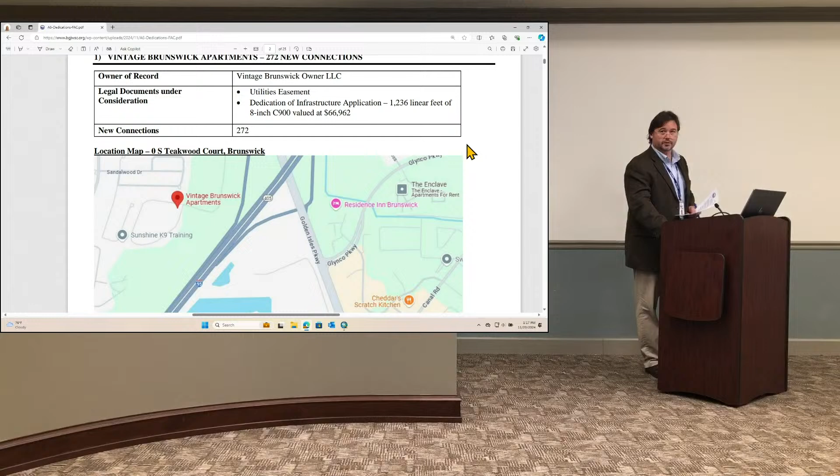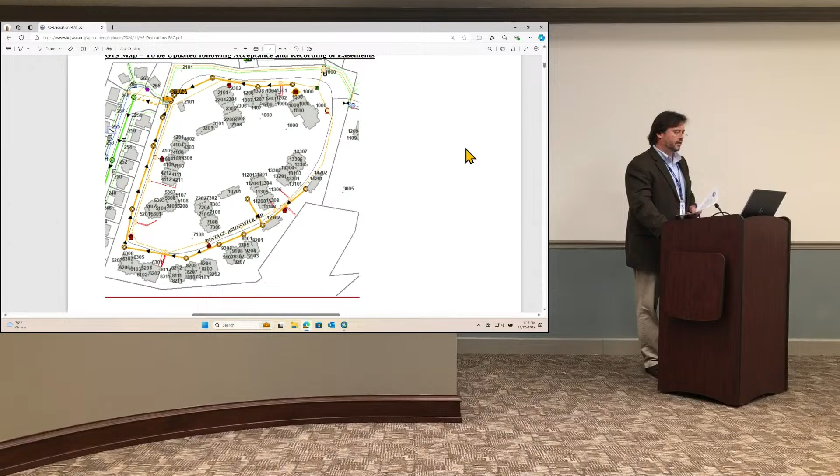This development has been occupying in phases, but they're finally done with everything, all final paving of the different phases. 272 new connections or apartments out there is what that's bringing on as customers to the Joint Water Sewer Commission. The yellow line indicates private on-site gravity sewer going to a private pump station that has a force main that jumps out to our closest manhole.

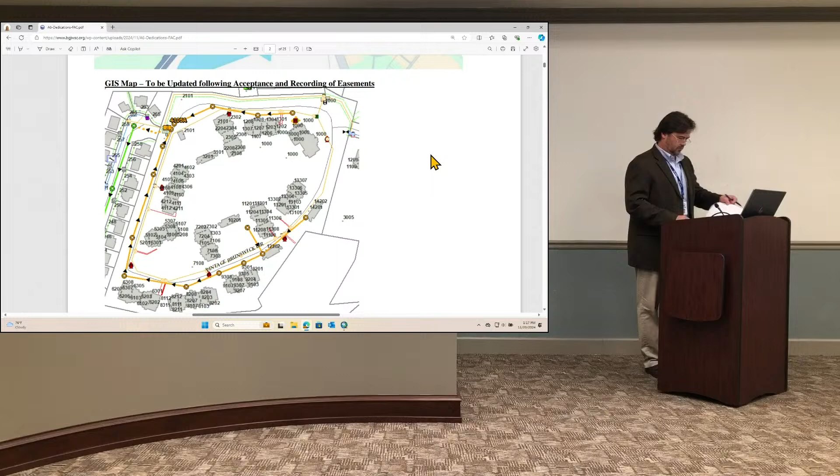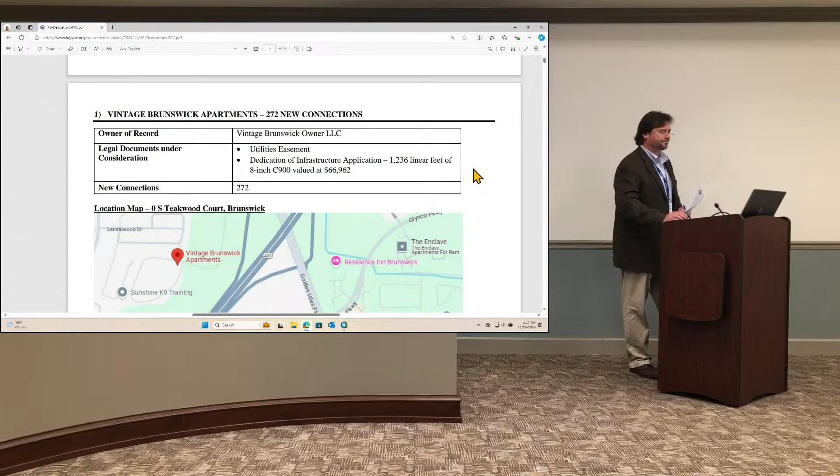In this case, this is the water line we're talking about: 1,236 linear feet of 8-inch C900 water main, plus a little bit of easement. Now, we'll point out also here, there's an adjacent development that's going on.

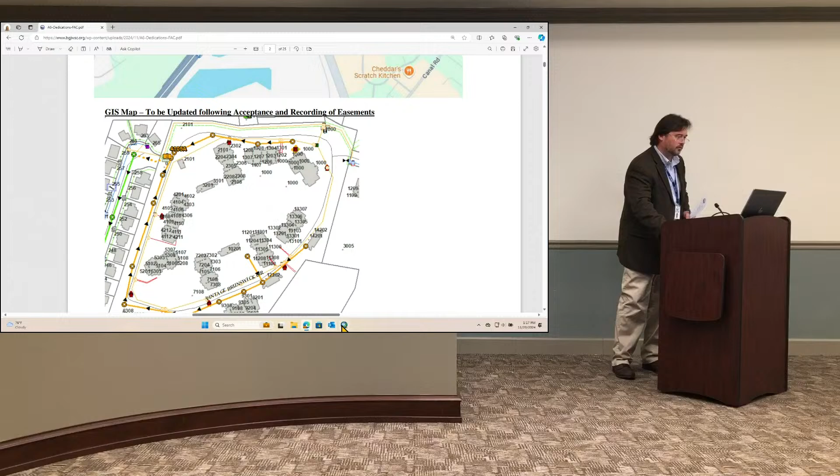Pull up GIS since I've already got it pulled up, help me explain this one. Vintage Brunswick - there is also an adjacent development going into this area here, and right now it's the same company developing both parcels. We had them give us an easement through here, of which they're going to have a force main that's going to serve this property. So that's not included in this dedication; it's just that water main.

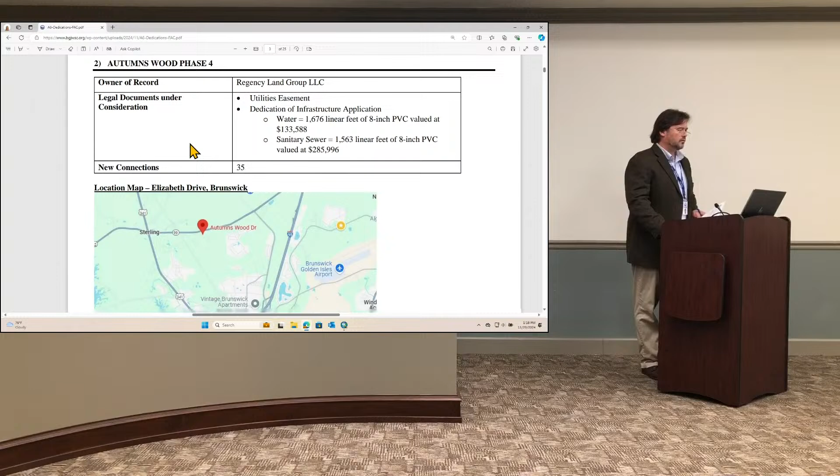Next one is back over here: Autumns Wood Phase 4. This is a residential development, the fourth phase, off of State Route 99, just a little east of the Sterling and 341 intersection.

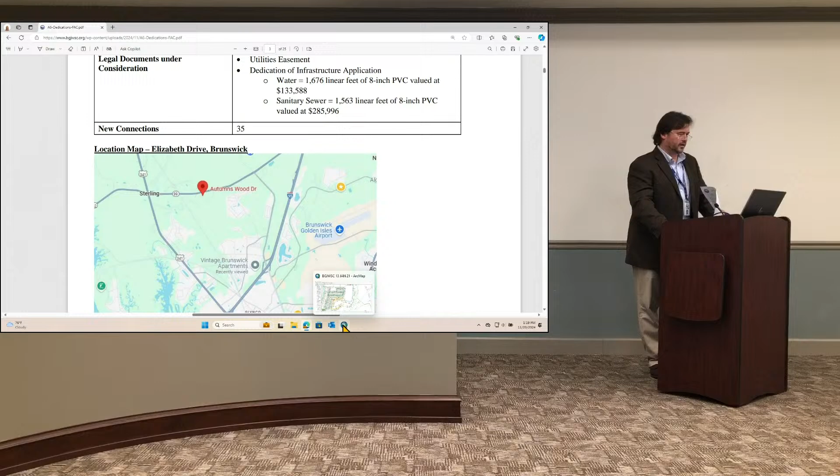This one has a little bit of water, 1,600 linear feet, and a little bit of gravity sewer, 1,500 linear feet. This will also wrap out the phases of Autumns Wood subdivision.

And that's located right here. In Phase 3, you may remember there was an easement and sewer main dedicated straight through this property of Phase 4, connected into the deep gravity here, which goes to our pump station 424. So there was already a trunk line of gravity sewer dedicated in the previous commission meeting, and this is the balance of the sewers for Phase 4.

And there are record drawings to support each item, and I'm happy to answer your questions.

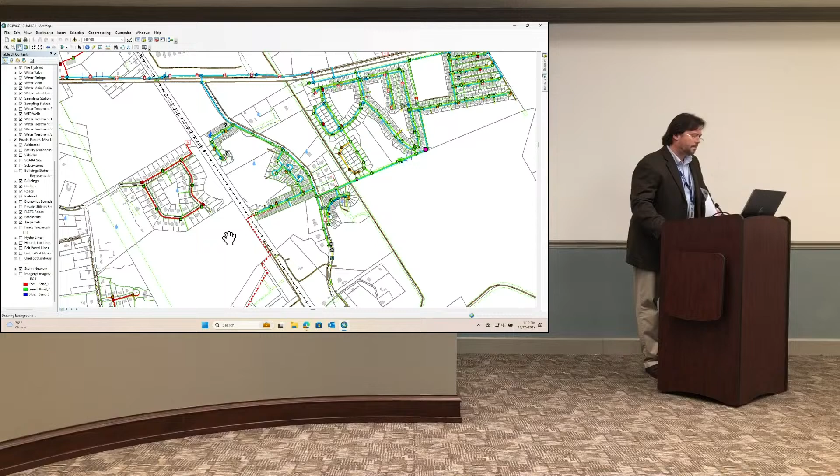What's the red circle for around Chanslor Place? They just circled that to indicate where it's at, showing you the area. So Chanslor Place, that's a place name for this subdivision - it just bled over on Glynn County's GIS, it's annotated that way. So that's not Chanslor Place, that's this development over here; Phase 4 of Autumnswood is this one.

When you see something in orange on our exhibits, orange typically means under construction with ownership not yet determined - could go private or public. In this case, it's going public, so it'll turn green if the board approves, for the sewer, and blue for the water.

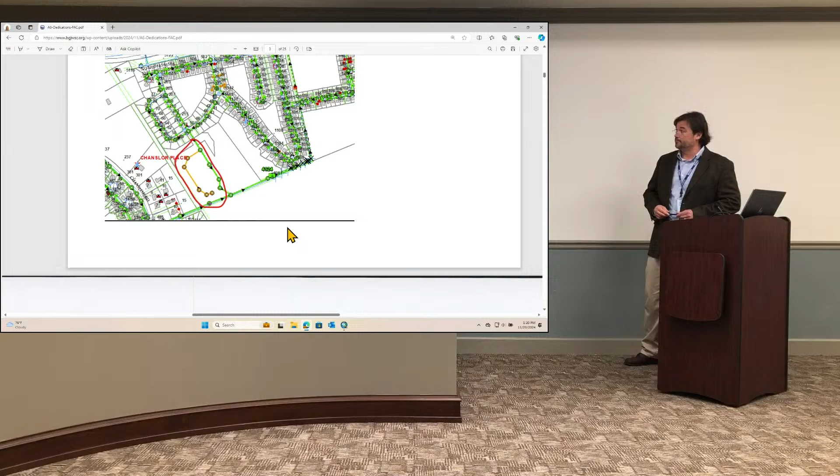Have a motion? I'll move the Facilities Committee recommend the Full Commission approve and accept these projects with associated documentation. I'll second. Motion seconded, any further?

I do have a question for Todd. On the Autumnswood values, can you explain how they reach - they're very close in linear feet and same size pipe, and the values are significantly different. Can you explain the difference in the two values? One's 133, the other one's 285.

He's talking about the difference between water and sewer values. How do we reach those values? Commissioner, I can provide an explanation. I'm just wondering how we reach the numbers like that - is it because of the labor involved in putting it in? Correct. So the values, and thank you for asking this question, this gives us a chance to point out where that comes from. The values come from, and I think I've got a dedication document here.

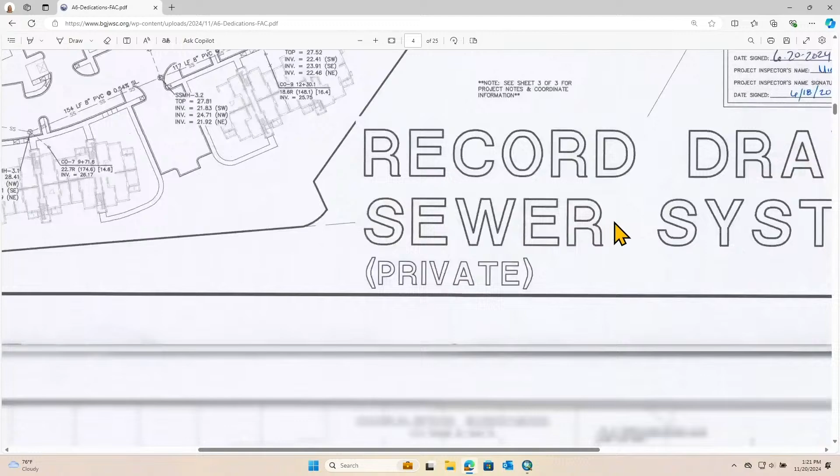Should have one down here for autumns. The engineer of record typically will fill out the asset dedication documents.

One has water line 1236 and it's valued at 66,000, and the other has 1,600, which is more, and it's valued at 133,000.

So the values typically come from the engineer of record who represents the developer. Their pricing is their pricing. It's not necessarily an appraised value, and it really doesn't have any effect on us.

It's still going to effect our property. It becomes our property. Correct. I was just wondering because there's such disparity. I know we accept them because it really is not of any value to us monetarily or anything.

It gives our finance folks a basis on which to capitalize the assets. But as far as the values, that is a fair question. We don't have a part in establishing that.

As long as it seems reasonable, we look at it to see if it's reasonable. If somebody were to put $1 in there, we'd raise our hand, or extreme amounts.

But certainly we're going to recognize differences between water and sewer and between projects. Sewer typically being installed deeper, well pointing and everything like that may be necessary, that's going to be more expensive. Typically, gravity sewer will be more expensive. There's structures involved. The gravity sewer is deeper, et cetera.

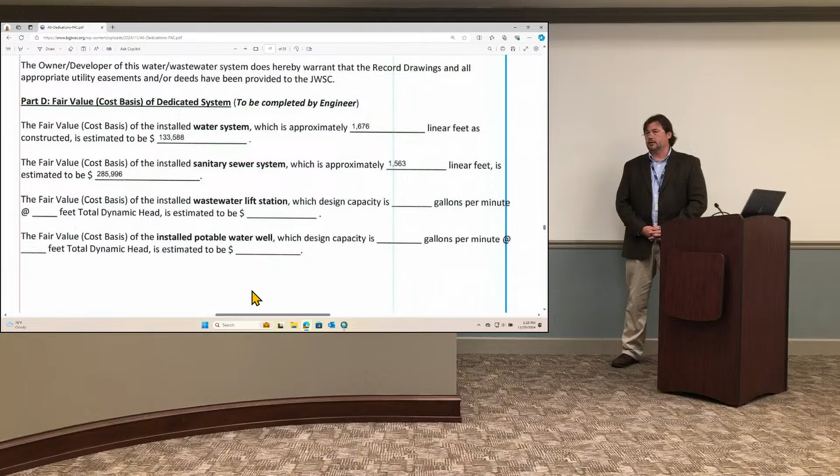Are there some sort of standards that are used in something like that, or is it just however it is? I mean, the assumption would be that they're just literally putting what they paid the invoices for as the total. But we don't get a copy of the invoices to confirm that, so I'm saying my assumption would be this developer paid contractor this amount of money, that was their cost.

I was just curious, because the numbers are very skewed like that, and there's no consistency, definitely. That is true. One of them says 8-inch PVC, the other says 8-inch PVC C900. So is it both of them C900? They'll both be C900 on the water line, yes sir.

All right. I don't even know what favor. Made enough trouble with questions. I think we made a motion. Y'all made a motion, but we ain't voted yet. Very good, all in favor, raise your right hand. Thank you.

Water production report, Mr. Burris.

For the city system, or the mainland system, for the month we did see a slight increase in flows because we finally got some dry weather for the month.

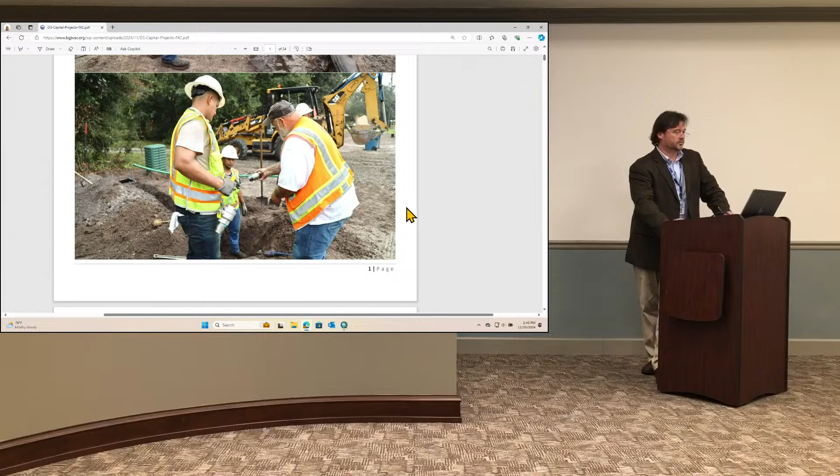You can see here, if you notice the silver finish of these fittings going in, these ball valves and whatnot on the air release valves, stainless steel is what we specify, 316 stainless on the appurtenances and valves and such. And you may notice these look like telecom cabinets of sorts, and that's kind of by purpose or by design. We used to use concrete in-ground manholes for air release valves. Let me back up a little bit. Air release valve - wastewater by nature will develop gas over time. Gas will come out of solution over time, formed from bacteria activity and whatnot.

That gas forms bubbles at the high points of the force main. Those bubbles accumulate, which can cause a lot of issues with your flow for your pumps. It creates a barrier, a barricade, makes it really difficult, and it can impact your flow rates. You have to get that gas out of the mains to get a solid pipe full of water.

So we have what's called air release valves at the high points, where that gas collects naturally. It exhausts that gas with every cycle, every push of the water down the force main.

Now, it's very important, these are a maintenance item like anything else. It still has to be maintained. A lot of times when it's in the ground in a manhole, it's forgotten about. So what we do, these pedestals are a lot more visible, easier to access and maintain.

They're also a lot easier to install in the right-of-ways. A lot of times the right-of-ways are really congested with other utilities, so it's easy to simply run your service pipe from the force main off to the side of the right-of-way. You can tuck it back conveniently and keep your force main functioning as it should.

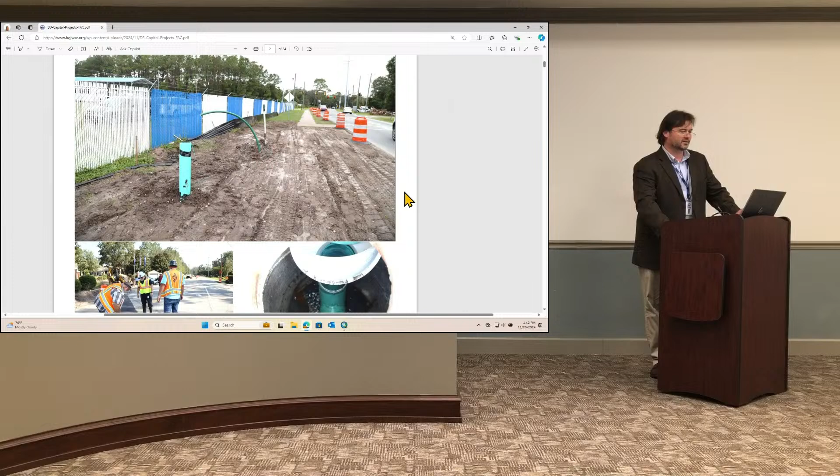So that's a good shot of the guys working there installing that, and that's typically one of the last things done in a force main project. There's a good shot of one of the locations of the service whip coming out for your air release valve, facing back towards Old Jesup Road.

This is a picture of what we affectionately call urinals - guys will get that. It's just a catch basin inside of a manhole with a downspout that directs the flow from the receiving force main down into the outward channel. That one's actually coming from 4107, I believe, the one on the upstream side.

Road patch going on here, and the guys are actually going to come back and square this patch off right in front of Eagle Pointe Apartments. They're going to do a little better job than just a patch, come back and square it off to make it look a lot better. That was one of our punch list items. With every project, we have punch list items.

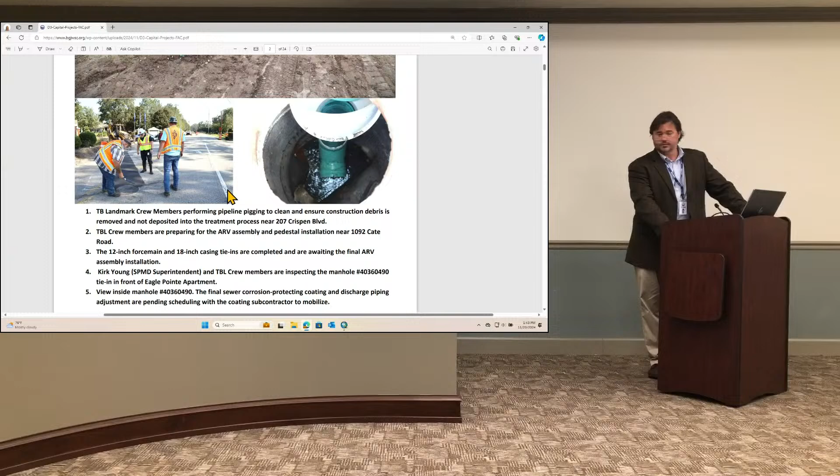One last thing to talk about here. The receiving manholes also receive a protective coating. When that force main discharges wastewater in, there's a lot of splashing and agitation. Gases can come out of solution and create a corrosive environment. So all receiving manholes we have coated with a protective coating that helps with the longevity of that receiving manhole, to protect it.

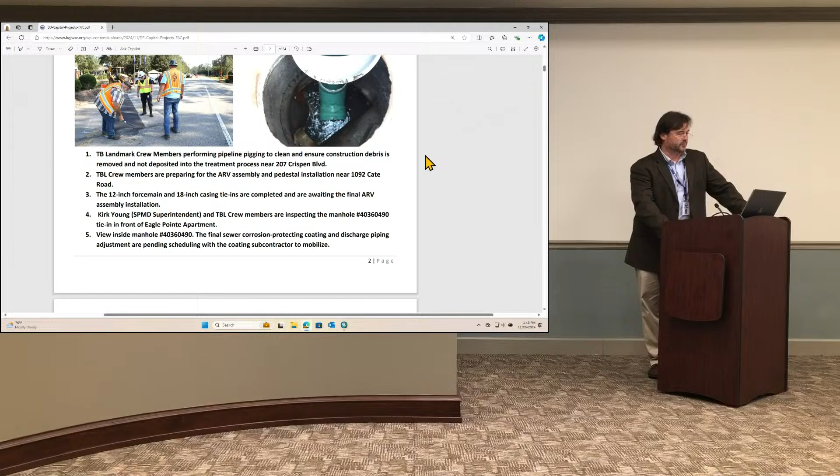Next project, Arco area, water and sewer extension. This is a really good aerial view of the last bit of construction going on out there as far as the installation of the sewer main. You can see the tight, unopened alley.

That's public right-of-way through there, an unopened alley that through the years has been encroached on - our legal folks would say trespassed on. But anyway, this was one of the adjustments we made with the project. The contractor actually worked with the engineer to get some of the new gravity mains out of the roadways, avoid pavement replacements, and get them into these public right-of-ways.

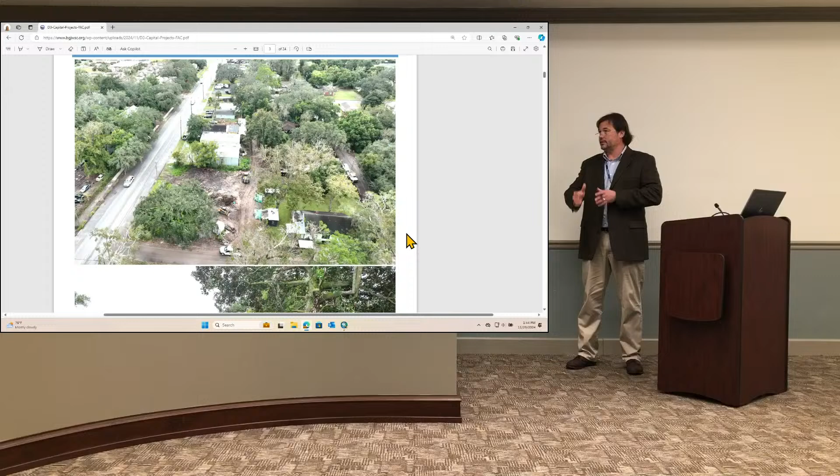It may take a little more work to open them up and get them in there, but it's happening. It's just a very slow, tedious, meticulous process. And it's a benefit to the customers because their laterals are already coming out that direction.

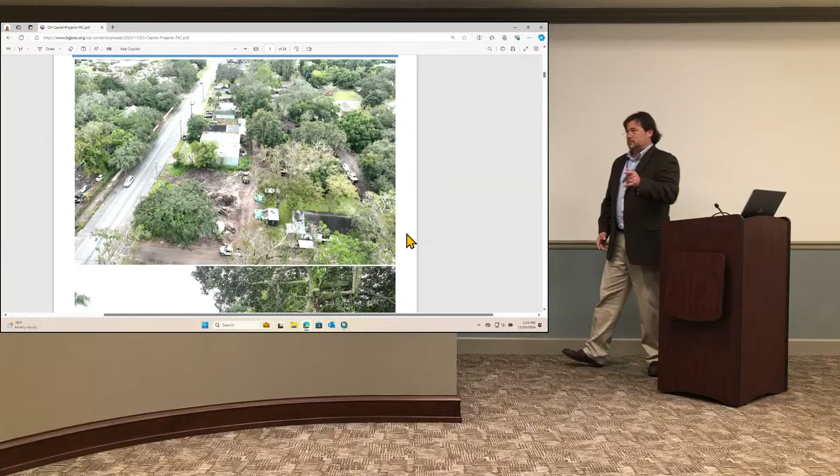Very good point - along the back of some of these you'll see septic systems, so this new gravity system is running right by their septic systems, which reduces their cost to hook in. Exactly, Mr. Burroughs pointed out it makes the connections that much easier.

And there are some of those going on along the way. Next picture down is another good shot looking down one of the unopened right-of-ways or alleys, and you can see the fencing, sheds, dog kennels, and everything else you can imagine that grows over time in those areas.

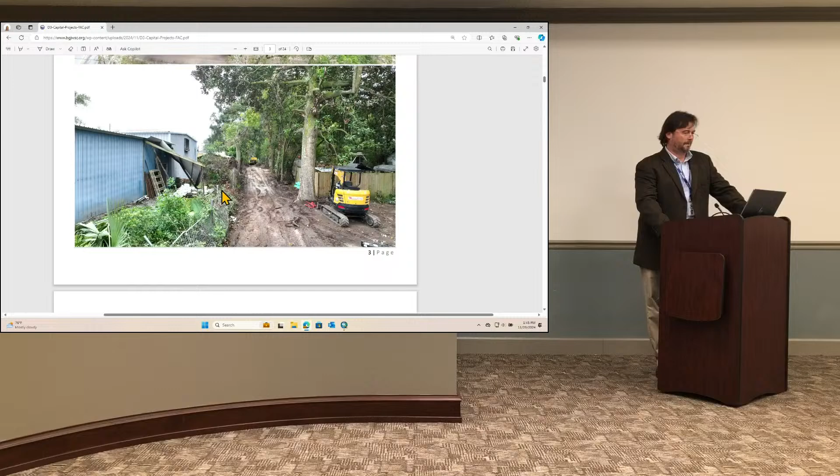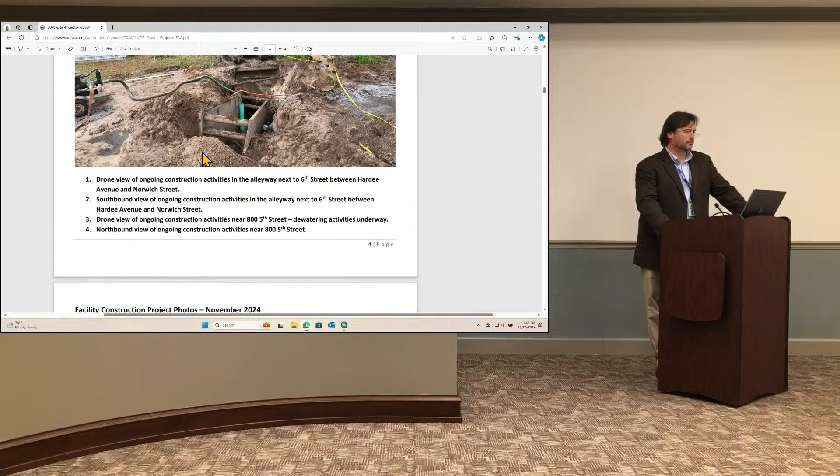More good shots of that, the type of work that's going on. It's a very wet area, as are most of our deep digs in our system.

Galvanized replacements, that's an ongoing project with our in-house staffing. They recently finished up Lake Circle Drive off of Old Cypress Mill, and they're finishing up the areas in El Dorado, Menendez, Rivera, those streets over there off of Frederica. Got to get one more section of 8-inch shot by the drilling contractor to tie all that loop in, but they're trying to get all of the customers tied onto the new line even before they loop it. They'll get more benefits once it's looped, but get them tied on the new line and off of that old galvanized line that's in there. Pretty immediate benefit and improvement in the service once folks are tied on these new lines like this.

Of course, look at the pipes. Yeah, that's typical. So this is Ms. Brandy, Administrative Coordinator for Water Distribution over there at the South Harrington plant, and she's proudly showing off some of the gold they've dug out of the ground that comes out of the scrap pile in the back.

Can I ask an obvious question? What was the goal of putting galvanized piping at the time, was it cost effective or? Technology at the time, it was probably the cheapest, most convenient. It was better than black iron pipe, had a galvanized coating, lasted a little bit longer, but it was probably the technology of the day. Sure didn't take too long to figure out that it wasn't going to work out in the long run. I mean, they put galvanized in for a good 20, 25 years, it went in the ground for a while. I'll say it's probably lived its life expectancy. It's beyond, obviously beyond.

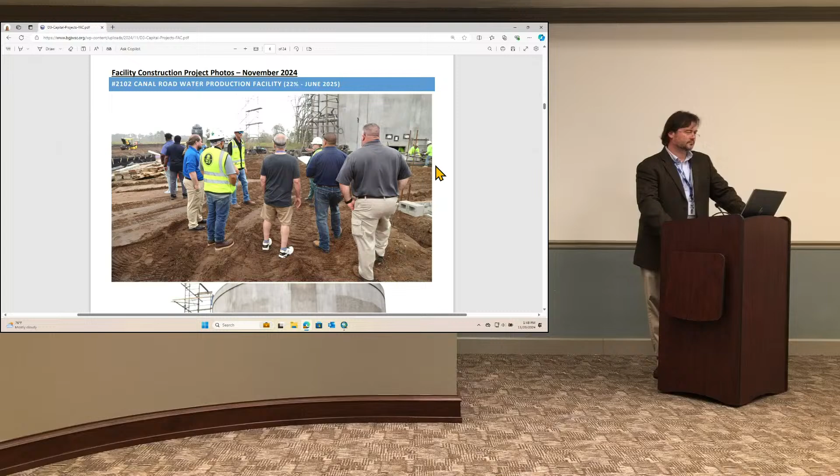Absolutely, good chance, Mr. Burr said, to show off the improvements Joint Water is putting out there for our customers. Thanks, been a hot topic on the Neighbors app also. Yes, they want to know, what is that big building, their ground building they're building there?

Missile silo, yeah, you know, I'm old enough to know about that. You can see a little bit in the background of this picture over here. Of note, this machine out here, that is Glynn County's project, to the west, which is their traffic circle for Glynco, Harry Driggers, Canal Road. There's technically 3 projects going on simultaneously in that intersection, so there's a roundabout, there's the widening project on Canal, and our project going on out there all simultaneously.

And FLETC's going, what's going on over there? This is very close to their back entrance back there. That's true. All right, so great picture.

This is another good shot again, just of the tank practically finished, except for the interior. Pre-con, or the contractor there, built that. Aerator tray assembly has still got to go on top, so it's going to get a little bit taller in total. And you can see the layout of the rebar, pipe stub outs, and conduit stub outs for electrical. That's where our building is going to go with our service pumps and everything.

Looking good out there. What's the capacity of that tank? 250,000 gallons for the tank, and the pumps will do about 1,000 to 1,500 gallons a minute with 1,500 gallon a minute pumps. Is that what those are? Yeah, they're typically, but they're on VFDs, so we run about 1,000 gallons a minute with them. But we have more capacity in case there's a huge demand in the area.

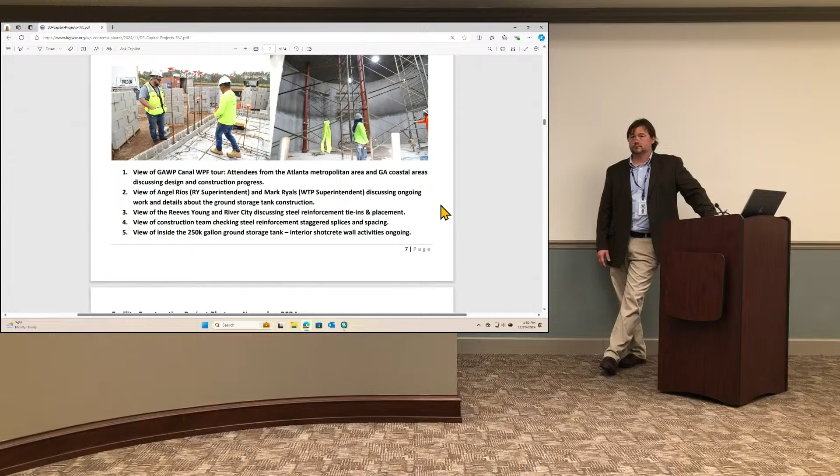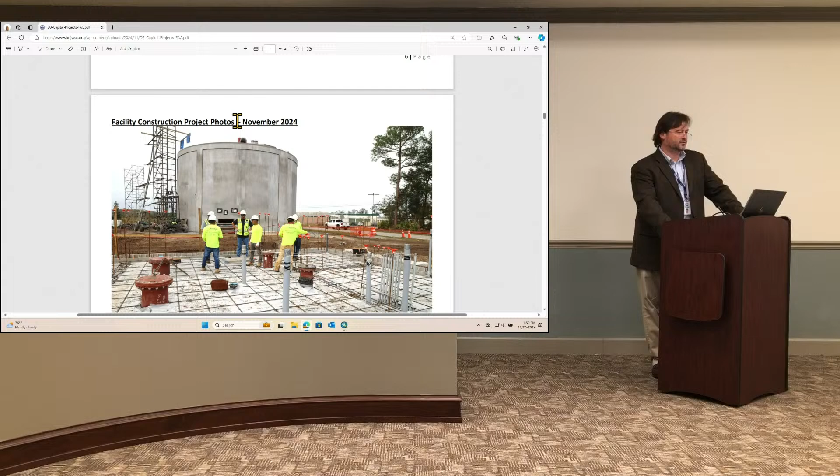And just a refresher on this: the water comes out of the ground from our well, and it pumps directly over the top through aerator trays, comes down through the top of the ground storage tank, or GST we call that, and it comes down here.

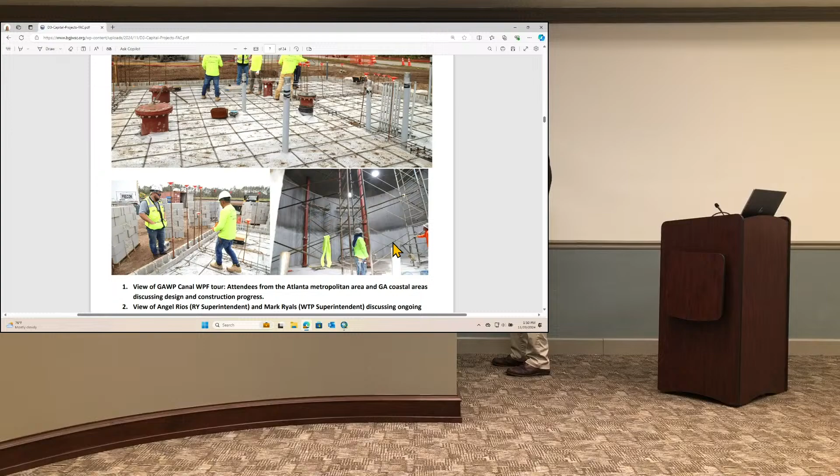Pre-chlorinated before it goes in. Yeah, we add a little bit of chlorine, so it hits that tray, comes down, and we hit the tray so it off-gases our natural hydrogen sulfide, which comes out of our groundwater. This is inside, there'll be baffles inside here to direct the flow of the water.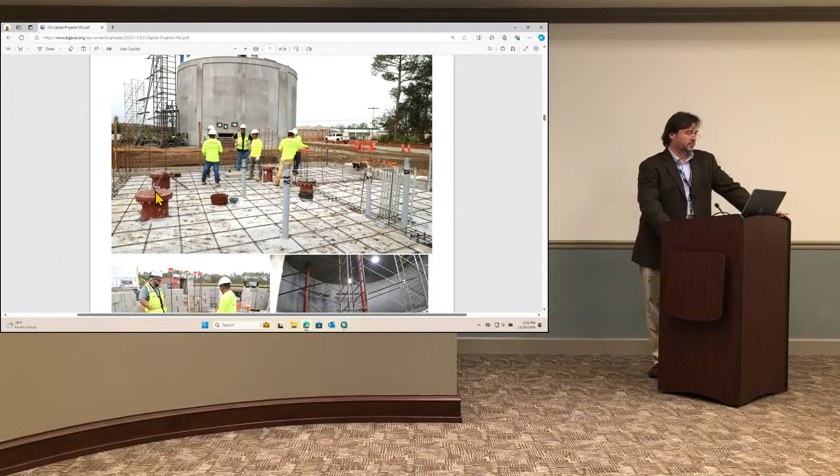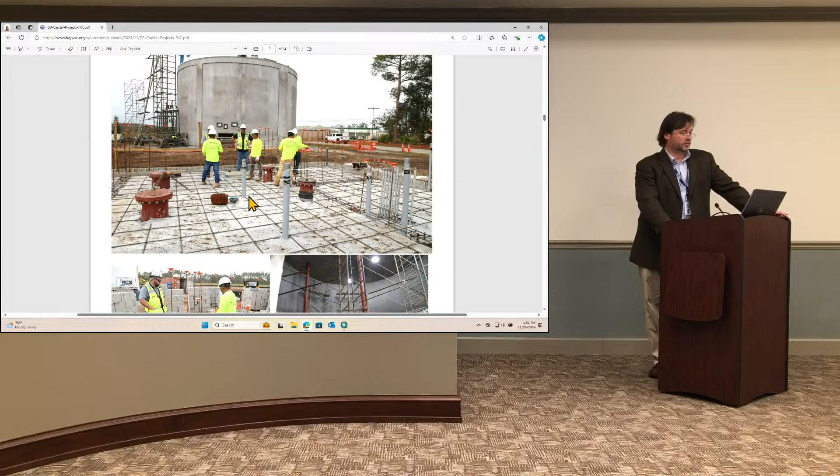This is a good view of the inside of the tank. It'll look a little different here once it's painted and whatnot. And then from there, our high service pumps will pull from the ground storage tank. It'll come out of there underground, and pop up from our influent line to our high service pumps inside here. And then from there, it goes into the distribution system and on out to the customers. So pretty much a three-part process: well, ground storage tank, then high service pumps.

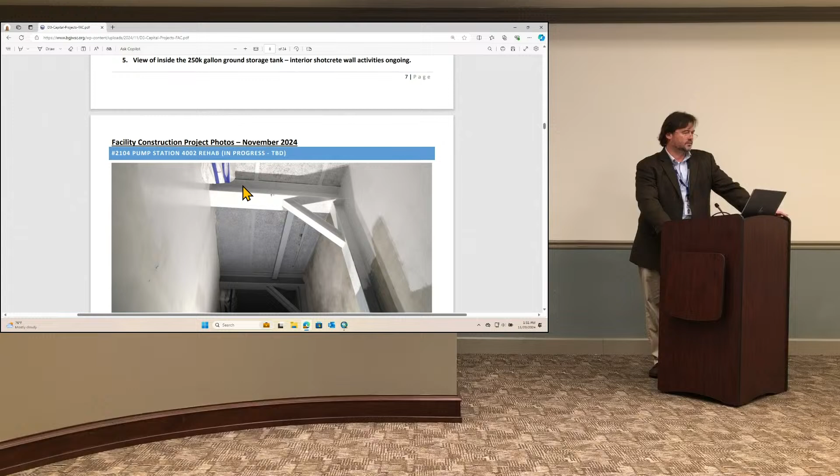A little bit of chlorine added along the way. And phosphates, yeah. No fluoride, we don't add fluoride. We have naturally occurring amounts of fluoride. We have not added fluoride in over a decade.

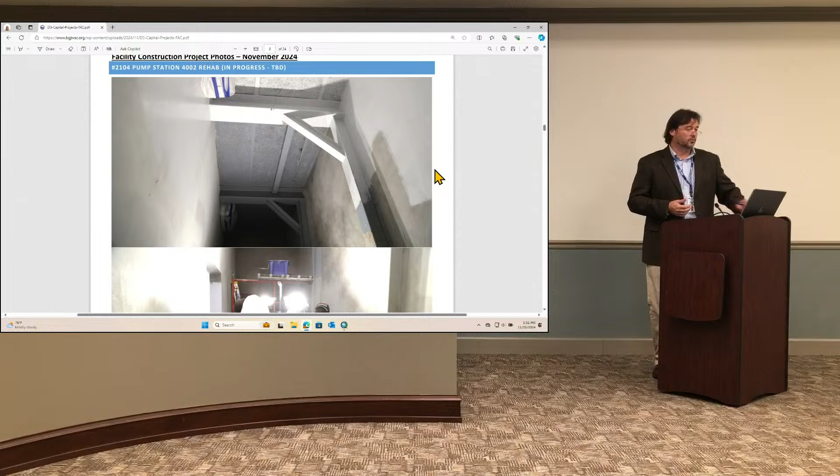Okay, next project, 4002 rehab. This is a group of three pump stations, 4002, 4001, and 3101 on the south end of exit 29. So making really good progress at 4002.

The station has received a substantial makeover inside. What you see inside of here is the electrical room, new wall put in here. And this is why we do a separate electrical room, so we can air condition the components that drive the motors, but in much smaller units to air condition just the electrical room versus an entire three-story building.

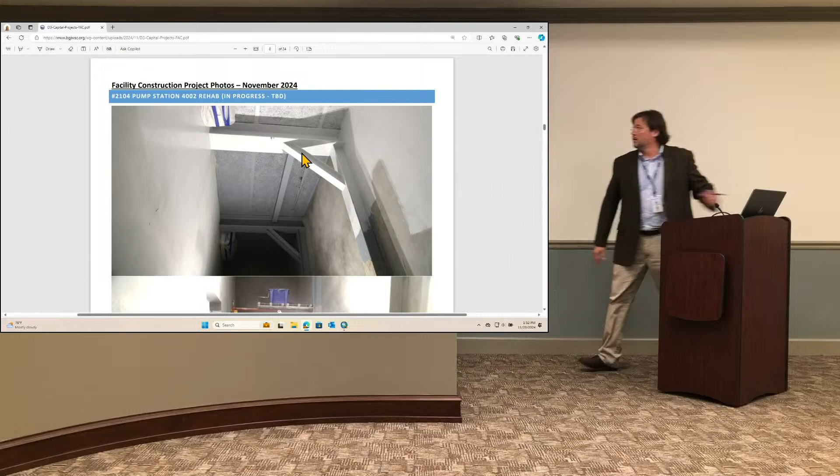Exactly. What's that top photo of? So this is the electrical room looking up. So if you were standing here with these gentlemen and you looked straight up, you would see this right here. And now this is one of the little things our contractor recommended, and they took it upon themselves once we said, yeah, makes good sense. They just added a reinforcing gusset in here for our beam, and that's actually the trolley that lifts and pulls the pumps from down below and on out on the back of the truck through the bay door.

And they noticed that when they were retrieving the pumps and whatnot, they saw a little wiggle going on here, so they said, hey, we need to stiffen that up. Made good sense, we appreciated that recommendation, and they went ahead and did that for us. But I thought it was pretty interesting out here, and they did a really good job of how tightly they brought this wall, this masonry wall, and meshed it into the existing ceiling. Really good job on that.

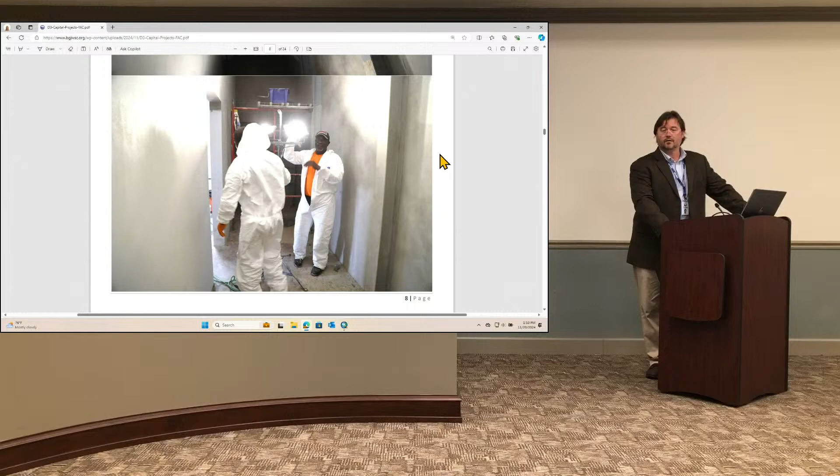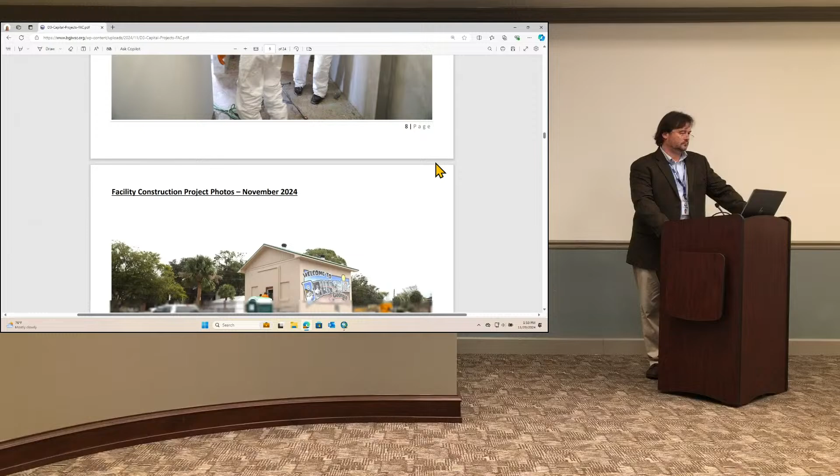So structurally, it's looking real good. Electrical improvements are going on right now, a lot of cabinets, motor controllers, et cetera. Last estimate we got was hopefully the electrical work will be done mid-December out there, so maybe we can get that portion of the project out of the way and get everything back on the normal electrical service off the bypass. So looking at mid-December.

Good, and thank you, Mr. Burris, for pointing that out. So we did try to really shave down contractor costs on this to get the best price we could. That's one of the things we did in-house, is providing the bypass for the contractor on this station. All the work's inside the building? Yes, sir, practically. There's a little bit all outside for the meter panel and that kind of thing, but practically everything is inside on this station.

And they're doing a really good job preserving the artwork that's on the building too. And a new door, thank goodness.

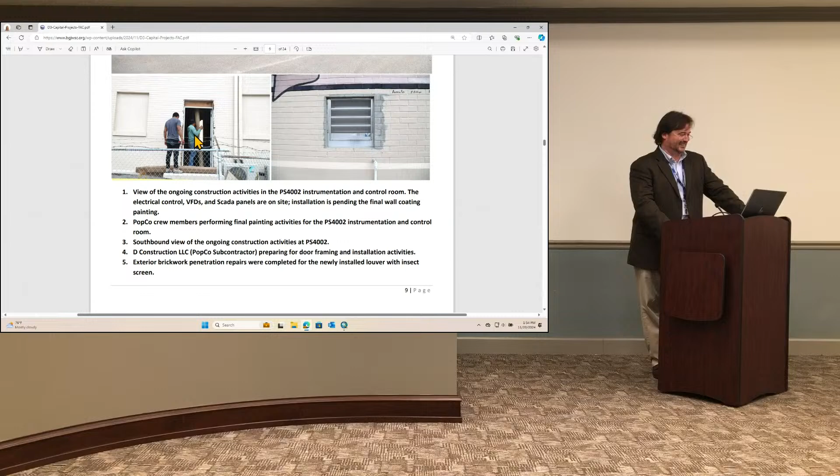That new door, the old door was a little drafty. Yeah, it's looking really good out there.

Okay, pump station 4044. This is a really good overhead shot. Gives you a perspective for the whole project.

Our old original station is right here, and this is the wet well and valve pit. It looks similar, but this is the wet well and this is the valve pit control panel behind it. You can see the big dig going on here. First thing we installed structurally was the wet well, that's the big 10-foot diameter wet well here.

That's now totally in place, and now they're digging back the gravity sewer extension all the way back to what will become a manhole, the existing wet well will. One of the cost savings things with this is they're going to relocate the Scada panel and bracket to the new pump station side over here, reuse all that. Got two bypasses going on.

Anything else to showcase? Hot off the press from Jason, they're backfilling now. So that's practically done, still got to cut the road to go to that manhole. That's going to be a bit of a traffic situation out there, definitely done at night. It's not very far, but here's a receiving manhole.

Right now, this force main comes down and dumps into this manhole here. It's going to do the same thing, same receiving manhole, but it's going to come from here now. Cut both lanes, this traffic will be rerouted probably down the connector here or whatnot in the meantime, but this will definitely be night work.

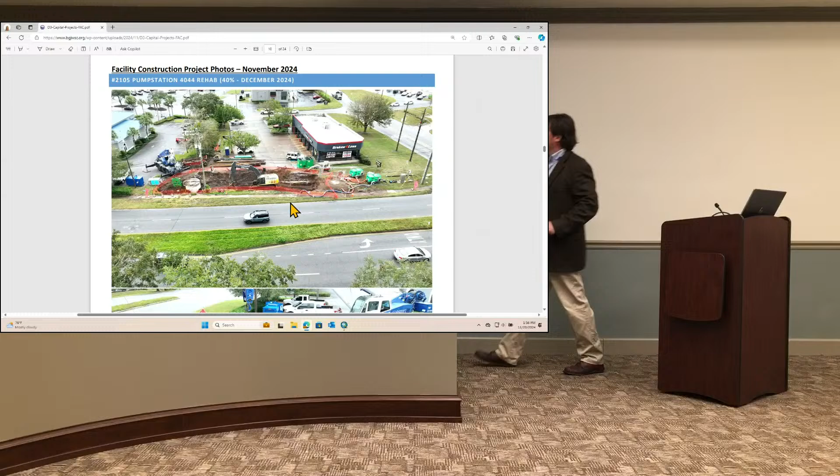Show us the manhole, show us where the pump station is on that picture, point to it, and then show us where the manhole is tying into it. Right, so we call these jumper stations, just a short little pump.

So here in the flatlands, we go down as far as we can until we get deeper than we like, then we have to lift it up, pump it up, and get it to the next manhole so it runs downhill, we take advantage of gravity. That's exactly what we're doing here.

Pretty deep, wet well existing, this one's pretty deep. We pump it back up and get it to the next manhole and let it run downhill to the next pump station, which is down by Sonic, is where this one's gonna be. So it is a short little run, but it's necessary.

There's some unique ways to skin the cat on that one, but in this case we're going back with a traditional pump station, duplex pump station. I tried to figure out how to eliminate it. It was not going to be cost effective.

Some kind of Venturi something? Or something, this just seems like there ought to be something you could do. I had to relay a lot of pipe to make that not be a pump station anymore.

Well, it's pretty minimal disruption though in the area. For right now, yes sir. It's interesting to look at when you go by, as long as you don't know what anyone's doing behind that orange fence. I've been tempted to stop a few times. I don't like that pretty deep hole out there right now.

You say they're backfilling now though? According to a message me and Todd got during this meeting, they're backfilling now. There we go, all right.

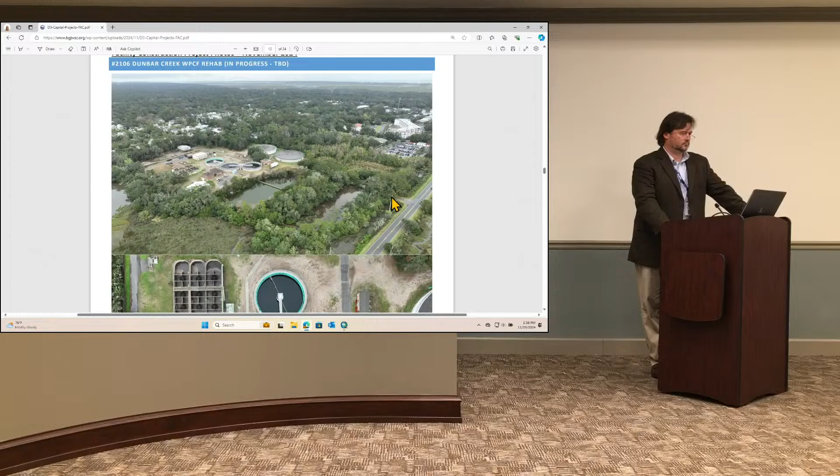If you go to the bottom photo, Todd, instead of trying to make that turn, we're either going to take that tree down, or go in between the building and the filter structure with the roadway, because it's pretty tight back in there now.

The other thing we're having to do, as we talked about earlier with the new permit, we're going to get a phosphorus limit. So the original proposal was to dose alum and lime to precipitate out the phosphorus. At the conference, we were made aware of another product that is only a single dose and does not increase the amount of sludge that is created, because the main issue with alum and lime is you create a lot more sludge that you have to deal with.

I've asked the contractor, and because it's design build, the engineer through him, to consider cost impacts of both options and make a recommendation before we move forward with what will be a change order to add the new equipment. Hopefully we'll have something for your consideration at the December meeting for the final change order to install the new chemical treatment system, and obviously a deduct for the roadway improvements. It'll probably be somewhere in the $200,000 range net by the time you do the deduct for the roadway and the increase for the chemical feed equipment.

But the plant is operating very effectively as is. The phosphorus limits, because it's essentially all domestic waste, there's no industrial waste coming into that facility, phosphorus isn't too high coming in there. It's an easy candidate for chemical precipitation, and we'll be very effective moving forward at that facility.

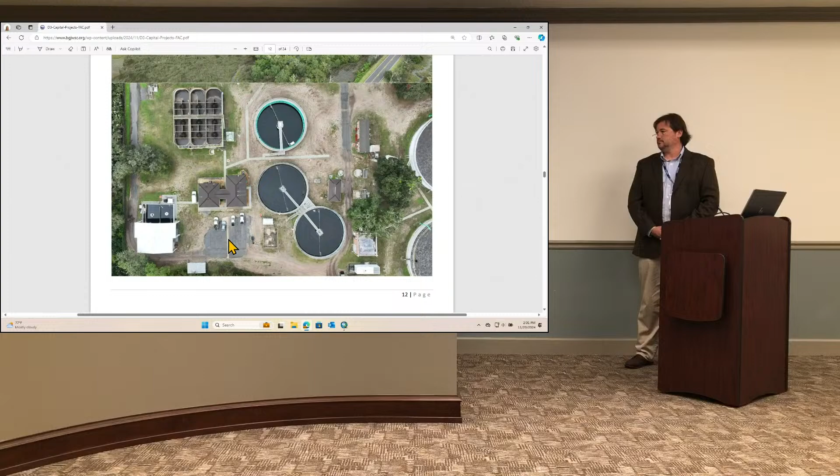When we get to 5 million gallons per day, it's going to reduce our numbers, which are up in the 80s now. We're running about 3 million a day, so we'll be at 75, 80% on a month now, but we'll drop back to 60%, which gives us a little more flexibility. Ultimately, the plant now is not permitted for 5, but it will treat 5. Everything's in place other than the phosphorus equipment to treat 5. So we've improved our hydraulics for high flow events and everything through this project. The plant is in really good shape right now.

In the future, we're going to need to do some work to the digesters and solids handling processes out there, but the actual treatment processes are in good shape out there now.

You should use this photograph in some material somewhere, it's a really impressive looking facility. Yes sir, you've got to get some grass out there though. Contractors hate having to get grass to grow, especially in sand, and they always seem to want to start putting grass seed down in November or December and wonder why it doesn't grow. Too bad we can't put some sludge out to get that grass growing.

That's why we're reducing the scope.

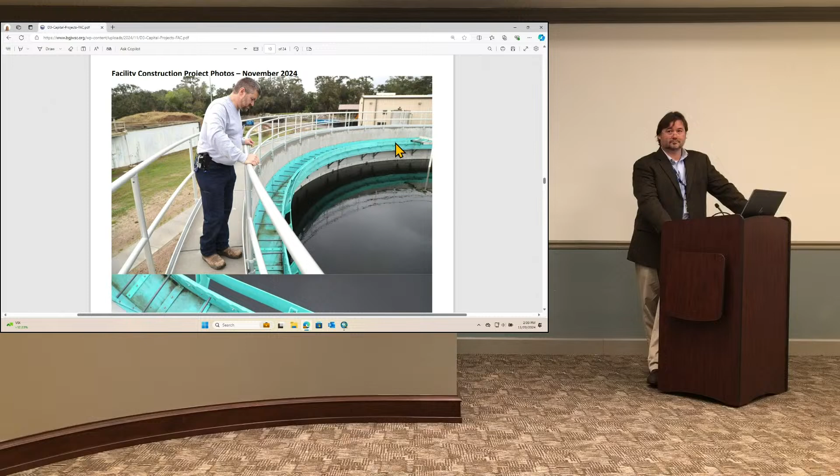On the next page, Mark Whitlow, the on-site operator, is looking at the new clarifier, that bright turquoise colored structure. It's the new structure and it does not stay that color very long because it gets stained over time. There's a slight leak on the weir that's causing some short circuiting back into the clarifier, the water flows over and then goes back in. That's being repaired by the contractor, it's just a punch list item, not necessarily impacting anything, just a minor item that has to be addressed.

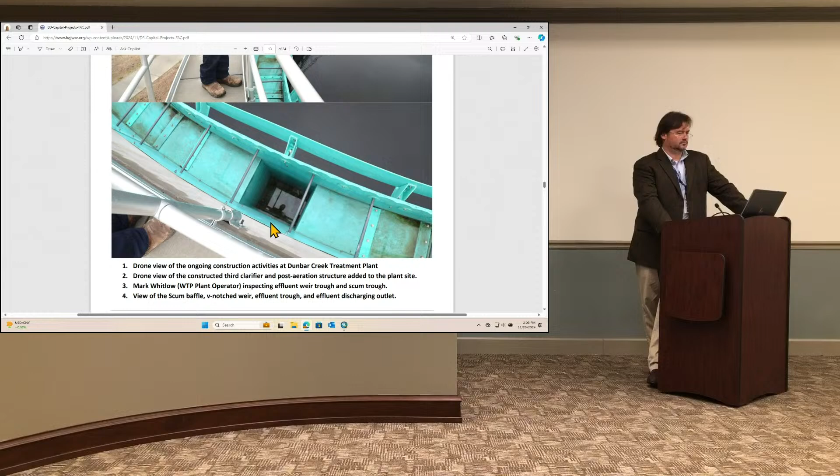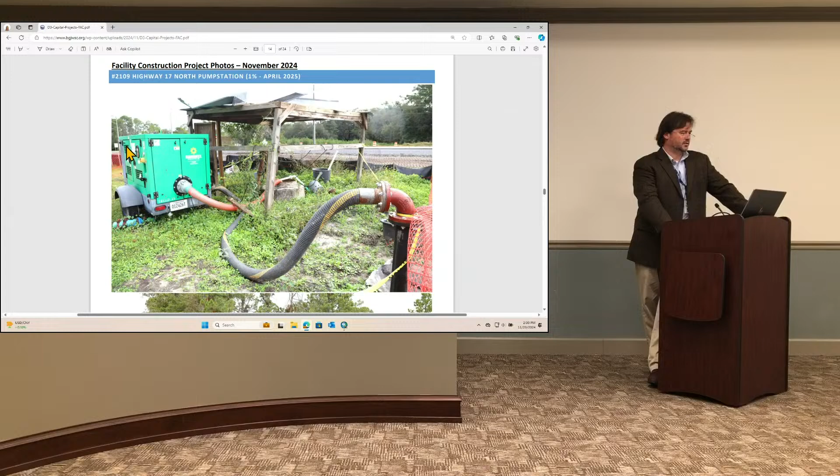Highway 17 North Pump Station at Golden Shores Mobile Home Park. No progress to speak of there. Just showcasing this existing structure.

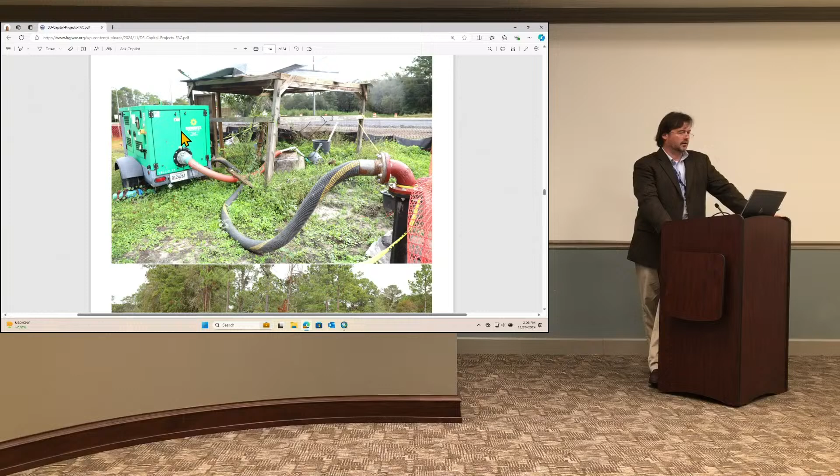Our contractor Popco is in charge of maintaining bypass assets for that station. Where do they have that bypass pump pumping at? Into the new force main, the 4-inch force main they put in, right? That's correct, or the 6-inch force main. I have no idea, because that little pump we had before was not getting the stuff through the system.

There's a lot of stuff in that pipe, and I question if we don't need to back that pipe out. If that pump's putting out enough, then just pull it on down. As far as the force main, it's probably done a pretty good job of flushing it out. The gravity collection system, no doubt, needs a look-see too.

I'm just concerned because of the pump that we had in there. I don't even know that we had one—it was just barely getting by. We don't even know what they had in there, a Home Depot special. It was 110 volt, whatever it was, because they had an extension cord run to it.

But it's going to be in much better shape. It's already in much better shape, and definitely will be in much better shape once our project is complete.

Here we go, Academy Creek RAS and UV upgrades. You got a shot there—that's in the existing chlorine building, right on top of the chlorine contact chamber. The guy on the right is our site superintendent from Reeves Young, and the other two gentlemen work for White Electrical, our electrical subcontractors.

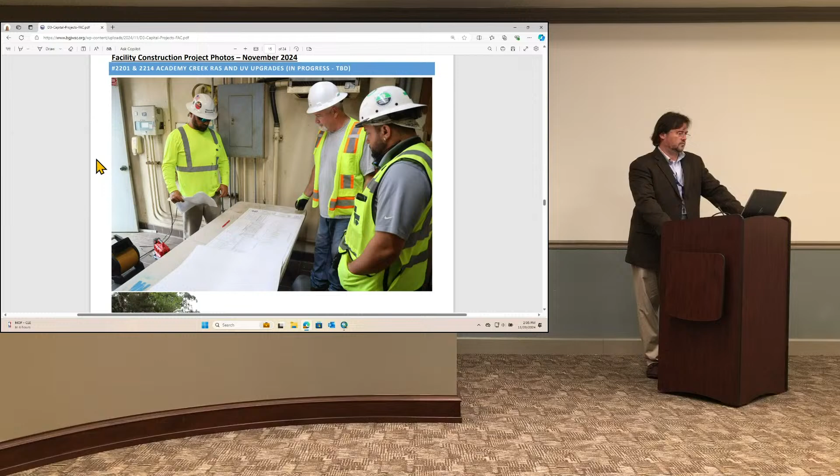Looking at the drawings there, because on the photo below you'll see the demo. Keep going down—you see all those interior walls have been demoed out now, and if you go there today, there's a lot more conduit that's been run in.

The subcontractor coming in to tie rebar together was hoping the electrical subcontractor would get all the conduits in so he could tie his rebar around the conduits instead of vice versa, because that makes the conduit routing much more complicated. So that's coming along nicely now.

A lot of conduit was put in last week. I haven't been there today, but hopefully the new sub is on site. All the rebar has been delivered, and they hope to be pouring the floor of that new structure in early December.

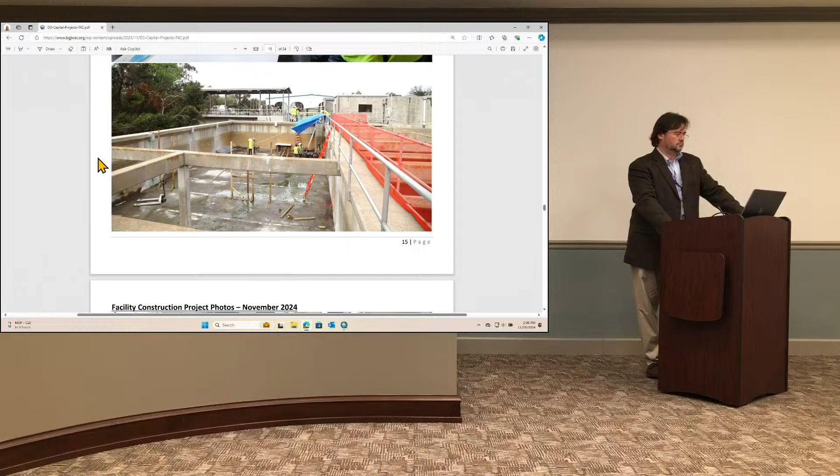Then there's the work in the RAS building—two pictures, you've got to look at both to see what's going on. There used to be concrete pedestals in there that have been demoed and are no longer needed. We put in a lot more electrical equipment, so we're trying to clear items that aren't needed to get more floor space so they can start working on that.

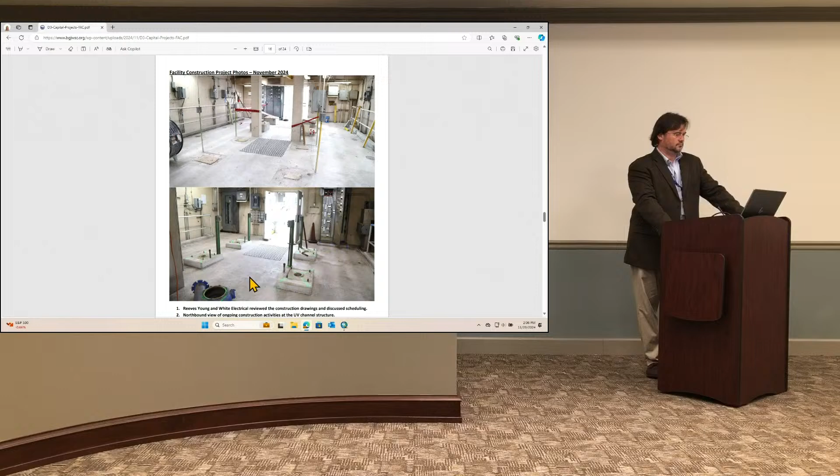The pumps were supposed to be factory tested last week. I haven't heard the results yet, but assuming they pass the factory test, those should be shipped and delivered in December for the new RAS pumps.

We're going to do one clarifier's worth of RAS pumps at a time as we go through, so it'll be a staged process. The new pumps will do about 4 times the flow rate of the existing pumps, which will drastically improve our ability to move sludge around at the facility.

I'm going to guess end of January. He says he needs 2 weeks once we get a clarifier down. I'm going to assume a month.

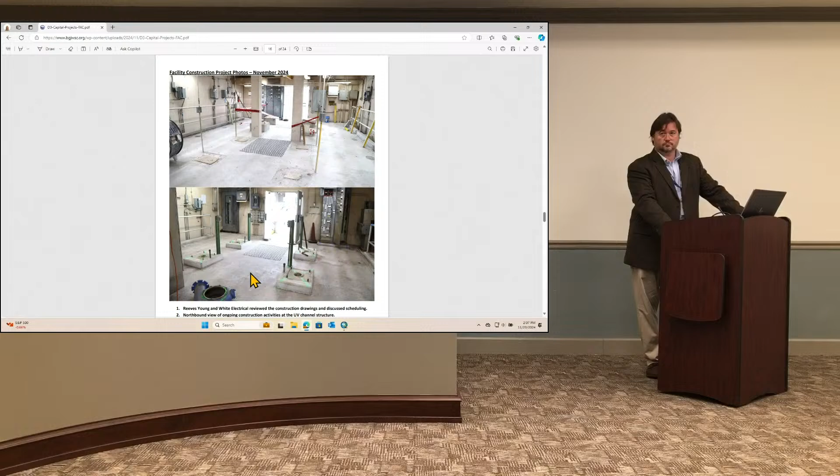Very good. Brunswick Villa area sewer extensions—this is an ongoing project here.

Looks pretty rough in the pictures here. You can see this is Carey Street, but it's limited areas—that's one of the intentions of this project. It was divided into limited phases so we wouldn't go in and obliterate roadways throughout the area until the project was complete. So it's limited for that first phase, on the north side of the whole project.

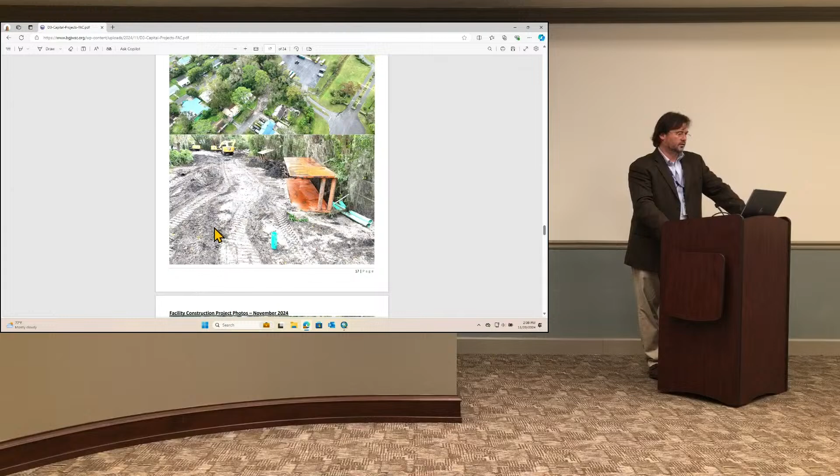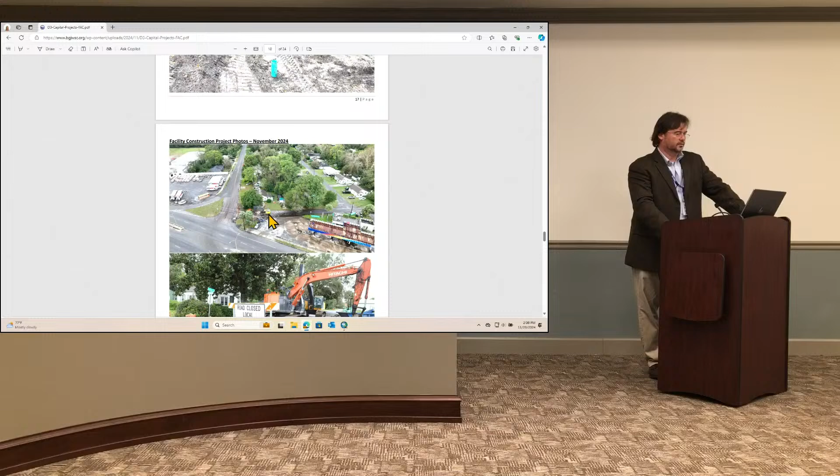The contractor's doing their best to keep access available for the residents and their trash collection and whatnot out there. There's another shot right here, right on the edge of Altama and Townsend Street—you can see how they snaked back behind the road to make this connection.

Right now the majority of the work's been up here on Carey Street and everything behind the Boys and Girls Club, through the fence there, and the end of Townsend down here. You've probably seen that at one time they had the road blocked off here while doing this work.

Good project. We're hoping it's going to pick up a little bit of pace as it goes forward, but we're looking forward to having all these folks on the sewer collection system.

Let's go Basin 4002. CIPP is an ongoing project there, and this is pretty much most of the basin, from Gloucester to the south, but even behind our office here they were doing some work. The basin does extend this way as well, so a lot of lining work going on there, and I believe they've actually been lining as well.

They've got about 20... well, I don't know what they've got done this week. They got it back in town yesterday, so they haven't got any liners installed this week. They're about 2,400 feet lined so far. They're doing 5 miles, so we got about half a mile done, a little less than half a mile, so they got about 4.5 more miles of pipe to line.

But going pretty smoothly. One thing to note, when you line a pipe, you have to go back and cut all of the services out. Well, in downtown Brunswick, you have a lot of services to go back and cut out. So they've worked some long hours because once they get it, they cure it for 24 hours, they bypass, cure for 24 hours, and then have to go back and cut services.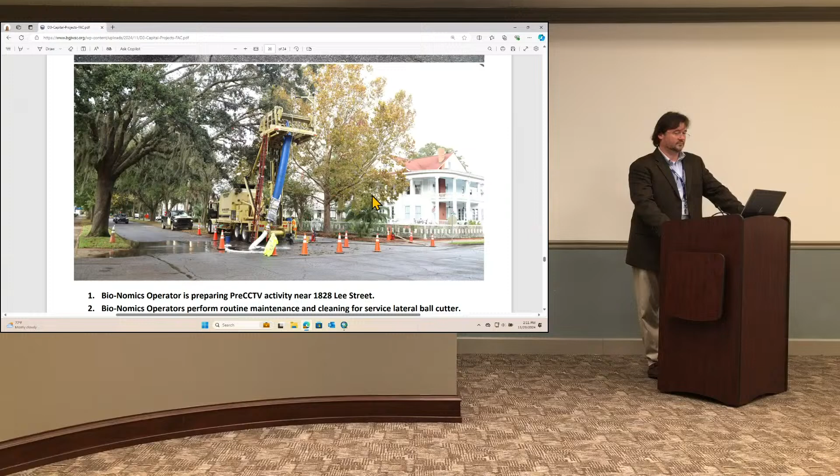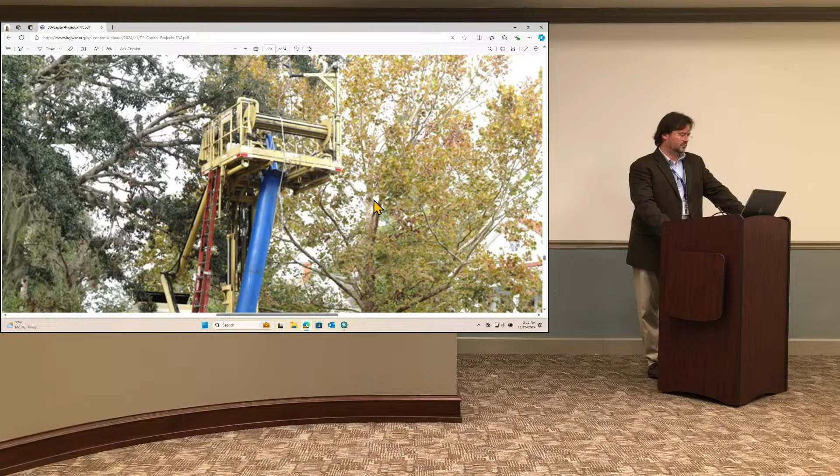So got some bigger lines closer to the pump station that's got to be lined. That's somewhat depending on them finishing the project up, because when it's bypassing, we have to let the levels get up a little higher. So we got to get that project completed so they can start getting on those lines. And then we've got some higher traffic areas we've got to deal with.

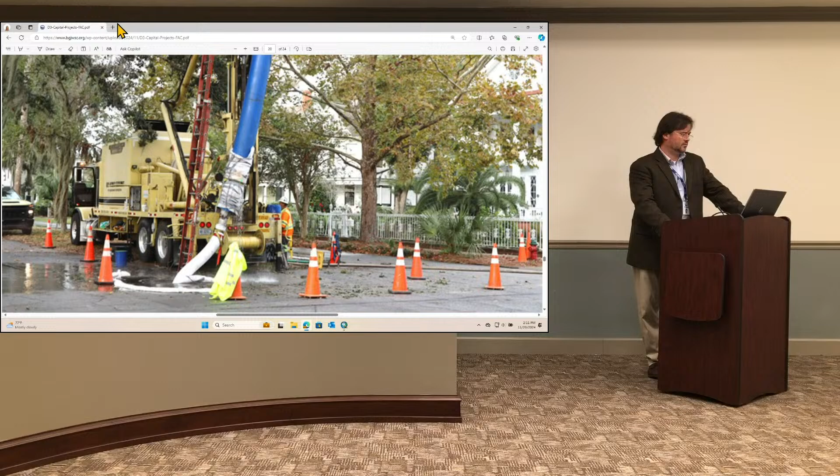There's a couple of segments in Gloucester that have to be lined, and the sewer line goes literally right down the middle of Gloucester. So that'll be done, started Friday night for hopeful completion in the wee hours Sunday morning, because we know there's a lot of traffic Sunday morning coming into the city.

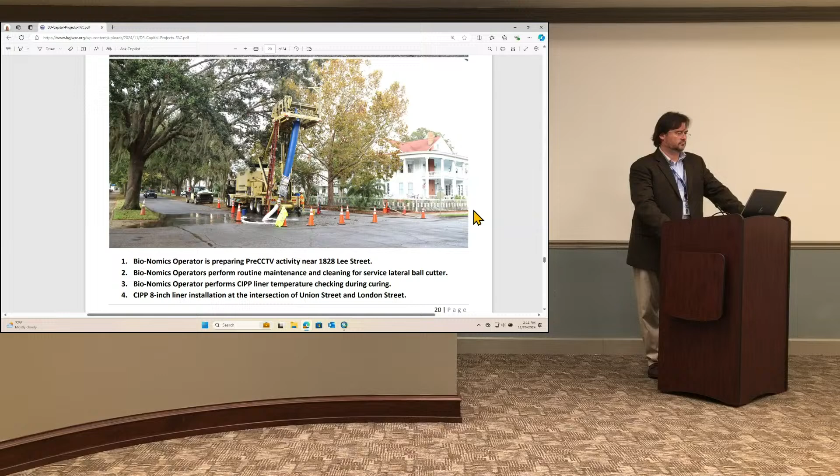And then there's also the old cast iron lines down between the courthouse and the Pate building that are in need of rehabbing, and so those will be done on the weekends as well, just because we know those are very high traffic areas, so they're keeping those into consideration. But going pretty smoothly thus far.

We'll make sure we have that truck in the middle of Newcastle during the Christmas parade. Put lights on it. Yeah, decorate the truck and put it in the parade. We'll dress Billy up as Santa. How about that? Hey, last time I saw him, he was rocking a pretty good beard. He could probably make it happen now.

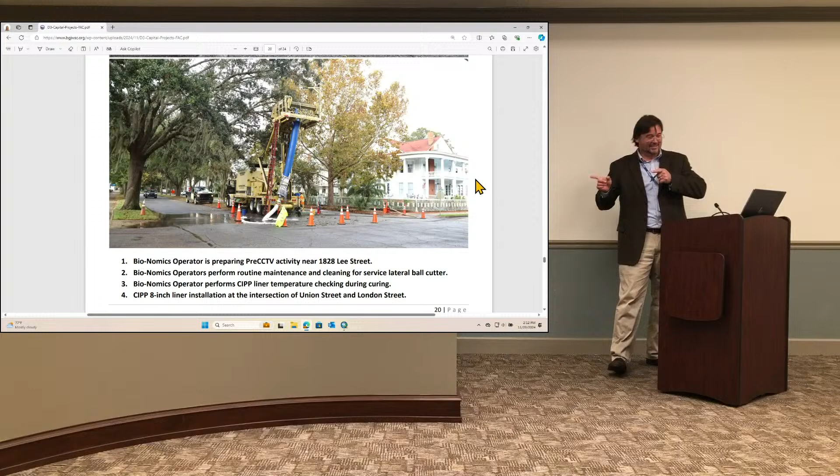And thank you for the heads up on Porch Fest, yes. Yeah, literally, this was Friday. Oh man, I called Andrew and was like, hey, just making sure. Good call, sir. Good call.

All right, so that's the end of the pictures. We have the detail, of course, in all of our projects listed out that are funded capital projects.

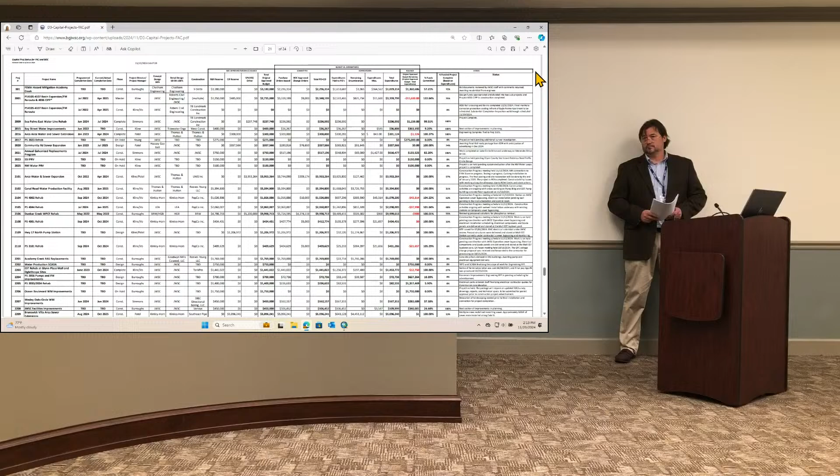Like we mentioned, the SPLOST project for Exit 29 is out for bid now. It's not a funded project per se, but the well repairs at Howard Coffin are out for bid. And we're getting very near bidding the Community Road Sewer Extension project.

Based on some feedback from Commissioner Ford, we've added running the laterals where there's gravity grinder connections, and running the service connections to the force mains to both sides of the road like we would during a water project. Typically during a sewer project we don't always do that, but we're going to stub out the services for everything along the way so people don't have to cut the road when they want to tie in at that point.

And then hopefully very near, we've sent around the last batch of comments for our generator installation project back to our electrical engineer for that one. So hopefully got some more project work coming out in the very near future.

Give us an update on the lead service line inventory. Yes, sir. We sent out letters last week, 50,000 letters end of last week. Because we had to send them out to the account holder and the property owner, and those are not always the same. If the names didn't match up in the database, you got 2 letters rather than us going through 30,000 line items to make sure which ones weren't the same.

So if John Doe was the property owner and Jane Doe was the account holder, and you happen to be married, you got 2 letters, I'm sorry. That's just the way that worked out. Or if you're Fletsy, you probably got 700.

But we've sent those out. There was an article in the paper, and if your service status is unknown, there is a survey attached in that packet. If you fill that survey out, which has pictures on what the different material types are, their service line is 18 to 24 inches deep normally. If you can identify the material of your service and send that back to us, for every 500 that we get back, we will pick one of those 500 and give a $500 bill credit.